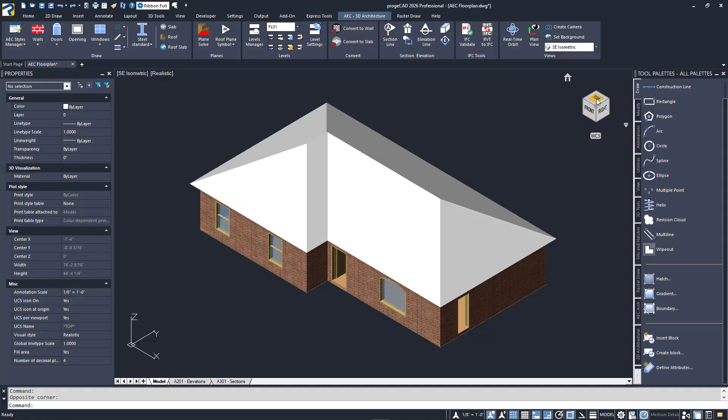For this video, I'm going to be using the AEC model I created in the previous video. It's called AEC Floor Plan, and I already have it open. When creating sections and elevations, it's usually easier to have your model in plan view or top on the view cube. I'll also change the visual style to 2D wireframe, which will benefit us when creating sections.

I'll be creating two of each and viewing them in separate layouts so that I can publish them to PDF together. The tools I'll be using are found in the Section Elevation panel of the AEC-3D Architecture tab of the full ribbon. I'll be using the two largest icons first, and later discuss the others in more detail.

The section line and elevation line icons look like they'd insert the annotation block shown, but they don't. They create a view plane that has a default depth. I'll start with the elevation line to demonstrate. Clicking on it, I'm prompted to select a start point and an end point, much like drawing a line.

After the second point, I'm asked if I want to keep the hidden lines. I don't, so I'll say no. Next, I'll be prompted for the insertion point of the 2D AEC elevation that I just created. I'll click a random point to the side of my model, and the front elevation of our house will be inserted. I'll do it again, this time creating an elevation of the left side.

I'll select the command and draw my view line from the lower left to the upper left. I'll say no to the hidden lines again, and click under the front view to see the elevation. And nothing happens. No view is inserted. What's going on here? The reason is the view depth is going the wrong way.

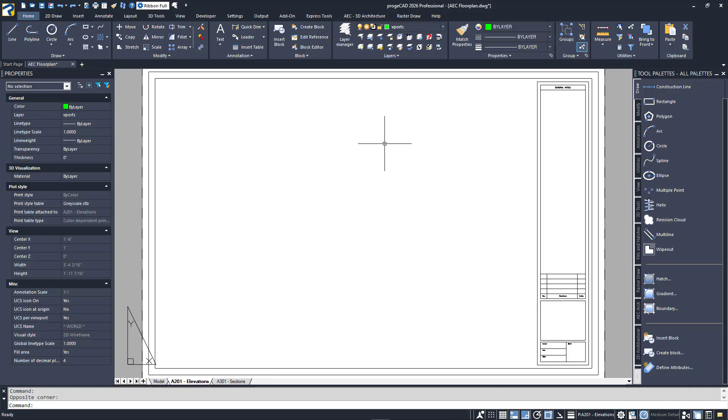To get started, I'll click on the A201-Elevations tab to enter it. We need to create some viewports for our elevations, which of course need to be on a non-plotting layer. I'll quickly switch to the Home tab, and using the Layer pull-down, I'll select a Viewports layer that I've set not to plot. I'll pop over to the Layouts tab and start the 2 Viewports command from the Viewports pull-down menu. I'll define the rectangular area to contain them, and of course, after I do, I see the model and

our 4 views displayed. I'll activate each and zoom and pan until my 2 elevations are generally in the middle of each viewport. When that's done, I'll go back to Paperspace and select both viewports with a crossing window. I happen to know that these 4 views I'll be creating are all 1:50 scale, so I'll use the standard scale from the Properties palette to set them both. And while I have them selected, I'll lock both from the status bar as well.

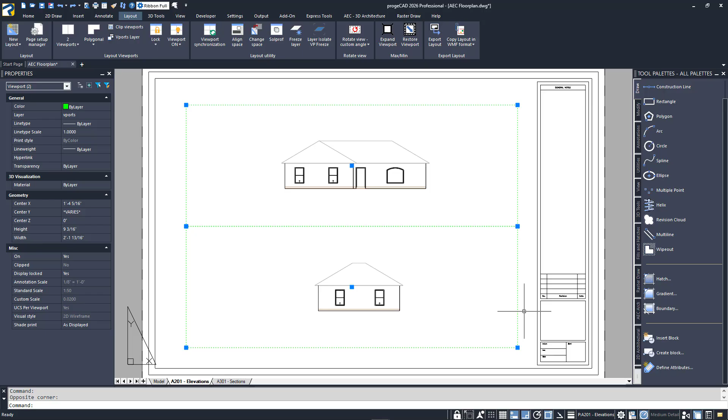I'll be doing exactly the same thing in the A301-sections layout, so I'll just skip ahead to the finished layout. I've got one more thing to demonstrate. As you know, things change. So what happens if there's a change in your model? Our top section view is looking at the two windows on the back of the house, so I'll make a change there. I'll go back to Model Space and delete the window on the left.

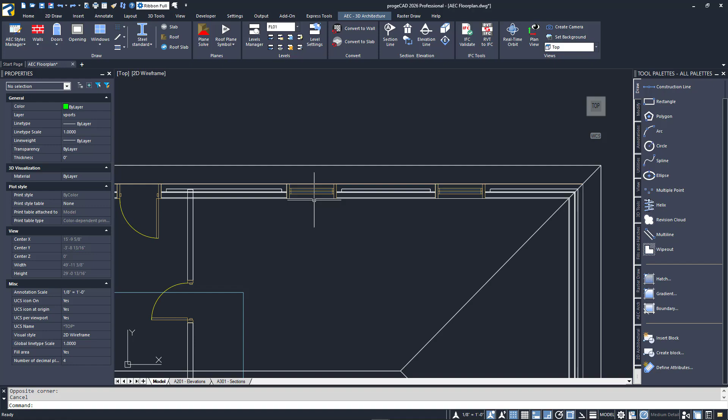Then return to the A301 layout, activate the top viewport, and unlock it. As you can see, the window I erased is still there. Your views will not update automatically, but there's a tool to update them. It's the icon with the blue refresh arrows. I'll launch it, select the view, and press Enter. Just like that, the view is updated. In this case, I actually want the two windows, so I'll undo a few times to bring everything back.

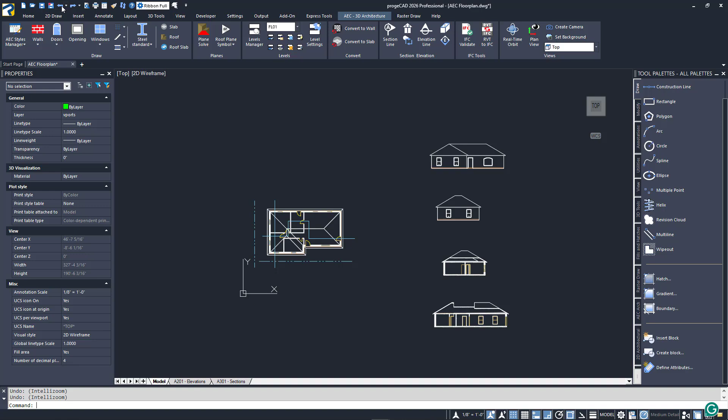Of course, I'm not producing production drawings. I'm just showing the process for generating sections and elevations. In the real world, I'd have callouts, view labels, and various dimensions and annotations. Our last step is to create a PDF of our layouts, but this time instead of using the print command for each, we'll do them both at the same time with the publish command. I'll start it from the print flyout in the application menu.

I'll quickly go through the most important parts of this dialog box. You can save your list of sheets to an external file that has a DSD extension for easy access in the future. I don't have any, so I'll just use the ones in my drawing. The publish command is reliant on a page setup being applied to the layouts, so I will typically change the Publish To pull-down to the printer named in the page setup. You can override that and select something else.

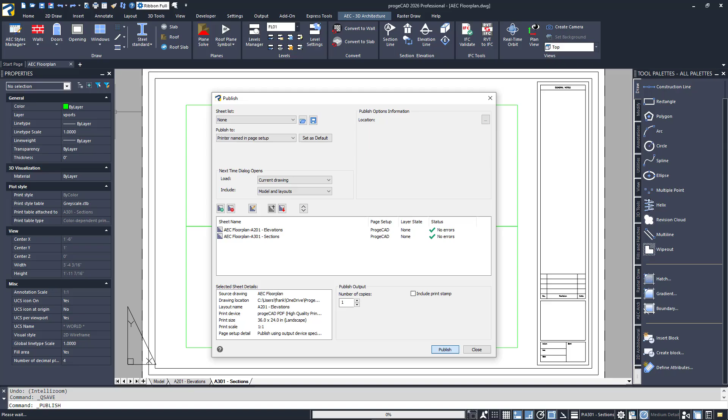In the middle is a panel with your sheets listed. Notice that I have the two layouts along with model space. Publish is generally used to generate output from layouts, so I'll highlight the model entry and click on the Delete button to remove it. Now we make sure our layouts have the proper page setup chosen. In this case, it's the progeCAD setup I've been using throughout the series. If I've done everything properly, the status will read as no errors, so I'll click the Publish button. Since I'm creating PDFs, I'll be prompted for a folder to send them to, and with that, I'm done.